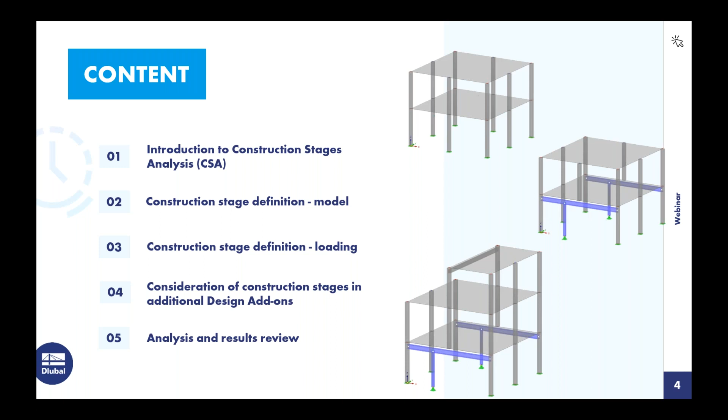So we might be wondering, why would we want to consider stage construction? Well, we know during the construction process that the structure may actually pass through several loading conditions that vary from the completed structure. For example, when we're talking about multi-level story buildings and adding each additional level on top of each other, the previous level is already undergoing deflections and stresses. So if we look at the building on the right-hand side, we set up our formwork for the first level, we let the concrete cure, we remove the formwork and we move on to the second level. That first level is already undergoing some of these deflection stresses from self-weight alone, or maybe some of those additional construction loads.

So we'd like to take those into account with stage construction. Now, regular simple structures may see very little difference when we compare the stage construction to simply applying the loads to the finished structure. However, when we're talking about multi-story buildings or structures with vertical irregularities, such as interrupted columns or walls, we might actually see a significant result difference between the finished structure versus taking into account each continuous stage. The construction stage analysis add-on within RFEM allows us to compare similar structures under different modeling or loading scenarios in a single file, and we also can include nonlinearities with these comparisons. Rather than creating multiple files with the first level completed, then the first level and second level completed, we can consider all of that in a single model.

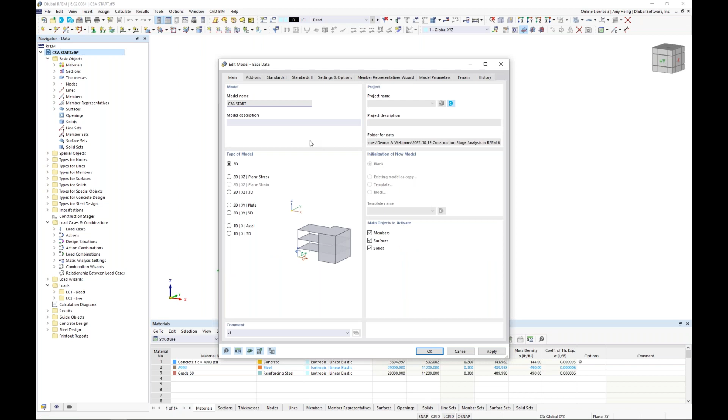Within the navigator to access the base data. Now, this is the same dialog box that would initially pop up when you create a new model as well. So under this second tab, this is where we have all of these optional add-ons. And this would allow you to essentially purchase these add-ons specific to your materials and your design that you're doing for your particular projects. For today, we're going to be working with the construction stages analysis add-on. You can see that's turned on here, as well as the concrete and steel design add-ons located over here on the right.

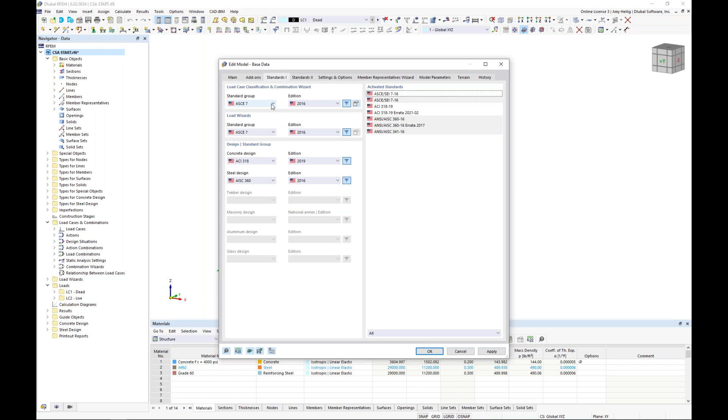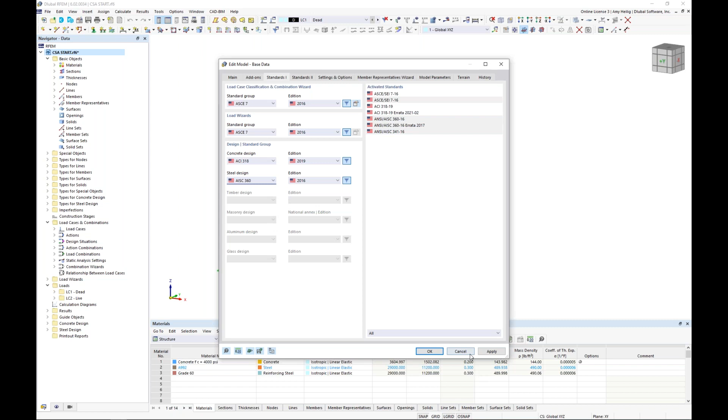So now under the third tab, this is where we set our standards. So we want to generate the load combinations according to the ASCE 7, which is available within this dropdown. We'll see here the NBC standard, as well as Eurocode and many other international standards. As far as the concrete design, we will be using the ACI 318, and steel design will be the AISC 360. Now, of course, again, using this dropdown, we can see the CSA standards available to us, as well as the other international standards. So once we have verified this information under the base data, we'll go back here to review some of the elements that have already been modeled.

So if we take a look again at the navigator, we'll see that all of our elements were utilizing 4,000 PSI concrete. Looking at our cross section, all of my columns here, if I double click on one of them, are going to be utilizing this 11-inch by 11-inch square section. Under the second tab, we can see that the concrete material here is set to 4,000 PSI.

Now, back under the main tab, notice that the design properties is checked on here. And this just simply means that we not only want to use this member for the analysis within the main program RFEM, but we're also going to do the design utilizing that concrete design add-on that we had turned on within our base data. So this just gives us all of the available tabs up here to define our reinforcement that will, of course, be used later on within the strength and serviceability design.

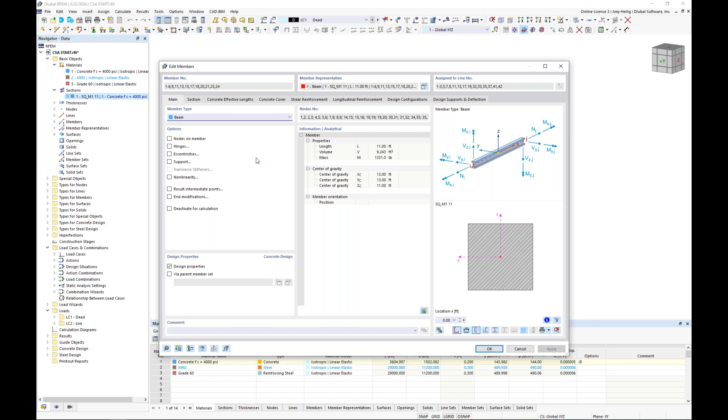Now, I'm not going to go into too much detail today. There is an additional webinar that's devoted entirely to concrete design according to the ACI that's available on our website and YouTube channel. So just to quickly cover this, we'll see here that we can specify the concrete cover. For the shear reinforcement, I have defined number 3s here at 12 inches on center. And then I also have my longitudinal reinforcement, which is going to be 12 number 6s spaced evenly around our cross section.

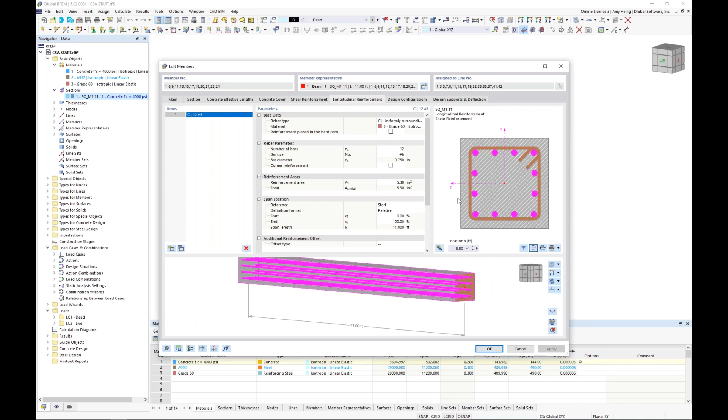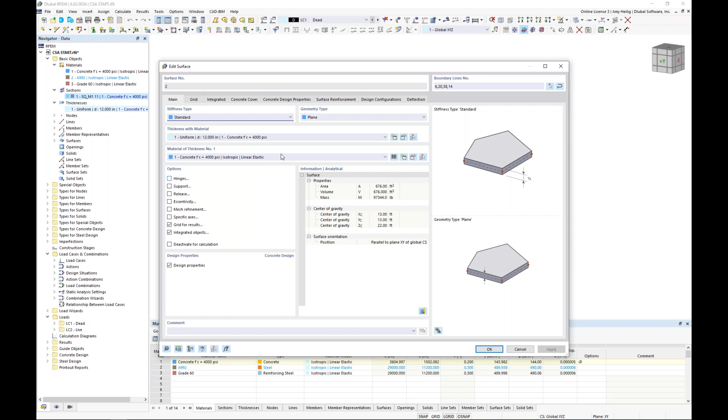So this is a very similar workflow here for my surfaces as well. Each of these surfaces was defined here with a thickness of 12 inches. So if I double click on one of these surfaces, again, we can see that thickness defined here, 12 inches with the 4,000 PSI concrete. Again, I've activated this design property, so we're not only using it for the analysis, but we also want to define our reinforcement for this slab to do the design later on within the concrete design add-on. We see here the concrete cover is defined, as well as the surface reinforcement.

So looking at this surface reinforcement, we can go into the details here. I have specified just simply number 6s at 6 inches on center in both directions for both the top and the bottom. So very simple application for this concrete slab. But I also have all of these additional free rectangular reinforcements defined. This just allows me to place some additional reinforcement. You can see number 6s again at 6 inches, where these concrete columns are framing into this slab. So rather than applying to the entire surface, we apply to what we call this free rectangular location.

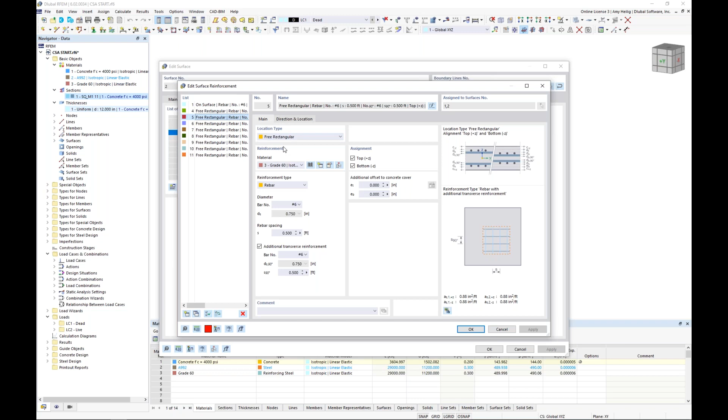So once we have defined all of our reinforcement here, what is actually turned on by default, if we go to our Display tab within our navigator, up here under the Types for Concrete Design, and maybe I turn this into wireframe view, we can actually see the reinforcement here displayed graphically. So we see our shear and longitudinal reinforcement for our concrete columns. And then, as I mentioned, those slab elements, we have our number 6s at 6 inches on center, but we also have some additional reinforcement here where those columns are framing into the slab. So we can always turn off this display just to get a little bit of a cleaner look here.

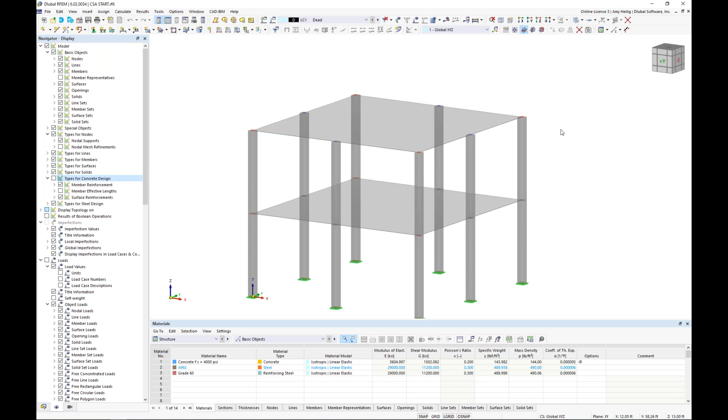Now, additionally, what else I have hidden, which I will turn on now, is the mesh refinements. So I've added these FE mesh refinements, you can see by these symbols here at the tops of each of the columns. So we know that within the program, we're likely going to get what we call singularities, where these single line elements, which are essentially our members here, frame into these slab elements at the single FE mesh point. So I'd like to refine the FE mesh here, which you can see I have gone ahead and done with a nodal mesh refinement.

Additionally, what I have defined, which we'll find here under the result objects, is what we call surface result adjustments. So now we can see all of those displayed here at the tops of our columns. And if I double click on one of these, we can see we have the ability to actually average out the internal forces over a set area. Again, this just helps smooth out those singularity areas.

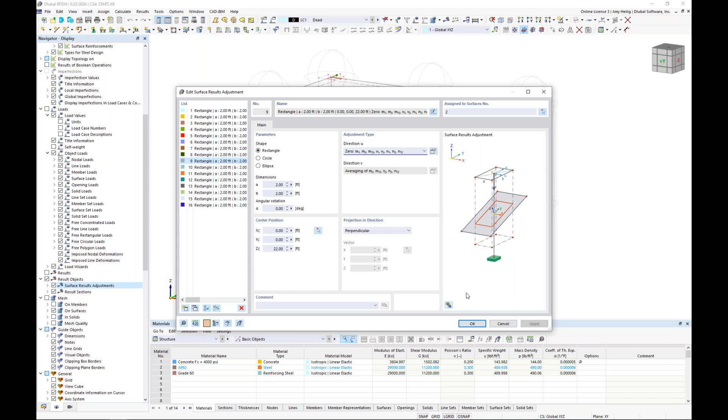For my simple example today, I actually just zeroed out those internal forces at those locations. They're not really a concern for our simple example today, so I went ahead and set that as the definition type here for these surface result adjustments. Again, all of this is just to help with those singularity issues. So we'll go ahead and turn those off. These will come into play a little bit later on.

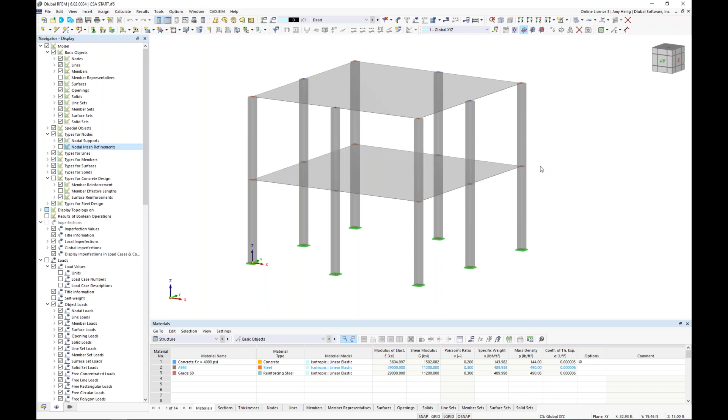But for now, we will turn this back into the rendered view. So this is my starting structure, just simple two-level concrete elements. And ultimately what I'd like to do is to remove these center two columns here on the first floor. Instead of these center two columns of this existing structure, I'm going to add in some steel beams that span between these exterior columns underneath the slab, as well as a couple of steel columns slightly offset from the center of the structure.

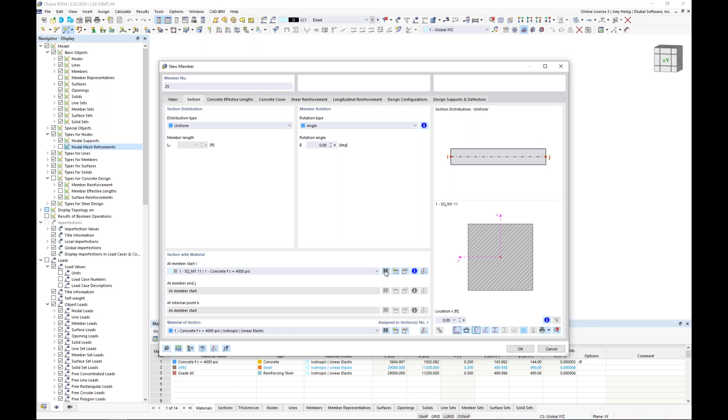So we're going to deactivate these columns and instead add in some steel members, which will describe the workflow of our staged analysis. Before we define any of these construction stages, we need to ensure that we have everything completely modeled in RFEM. So we will begin by drawing a new member, and up in my quick toolbar, I can draw a new single member.

Now, under the section tab, I want to define a new cross-section by visiting my cross-section library, and we can see all of the various sections available, including the parametric sections, where we simply input the dimensions and the cross-section properties are calculated automatically. Alternatively, we can view these standardized sections. For example, we can activate our I-beams, use our filters on the left to filter to the United States and to the AISC 15, and I want my beam section to be a W14x82. So I scroll down my list and select the 14x82.

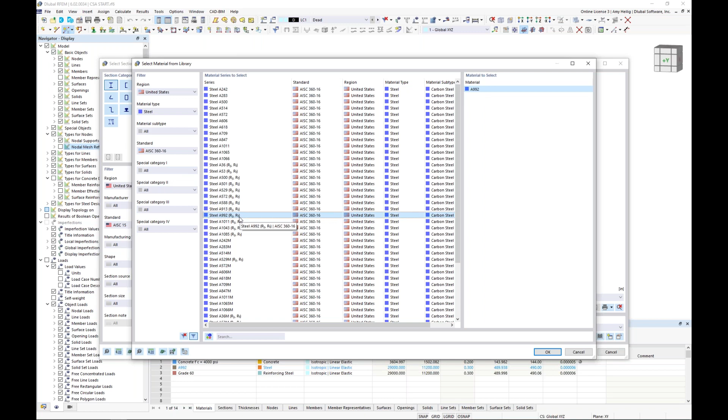Of course, we don't want this to be a concrete material, so we activate our material library for this particular section. Once we launch our material library, we can use our filters on the left to filter to the material type steel, set the standard to the AISC 360, and we'll see steel A992. I already have this steel material defined within this model, so rather than redefining a new material every time, I can just select it within my dropdown. So I select material number 2, A992, and our beam has now been defined with the correct cross-section as well as the material properties.

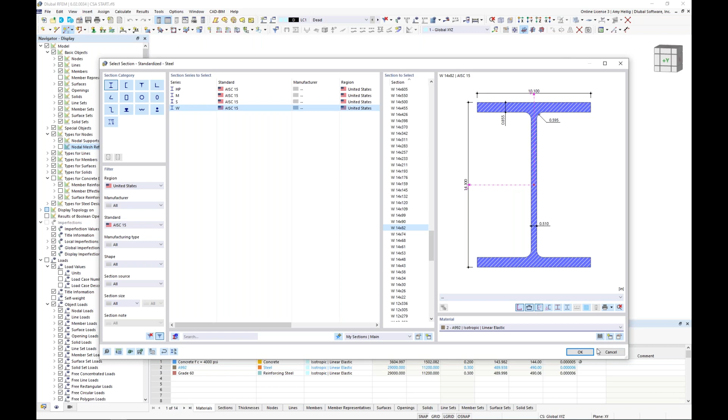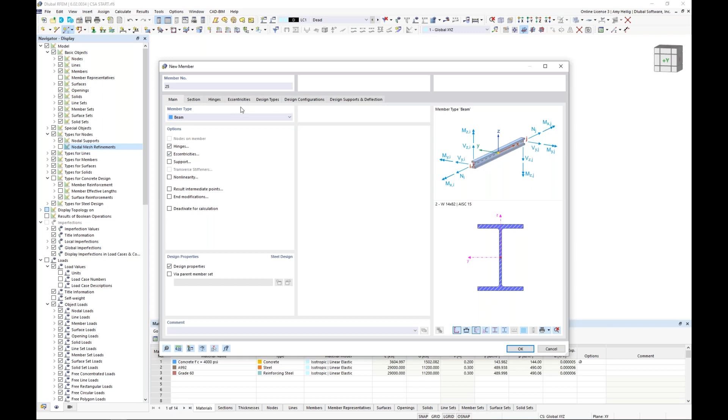In addition to defining the cross-section and material, notice that the design properties is turned on as well, but we're no longer referencing the concrete design add-on that we activated under the base data; we're now referencing the steel design add-on. Before I draw these members, I also want to activate a couple other options, including hinges and eccentricities. Notice we have two additional tabs up at the top. Remember that everything within RFEM is considered fully fixed. So if we want to release a moment, for example, at the ends of the member, we need to define a new member hinge.

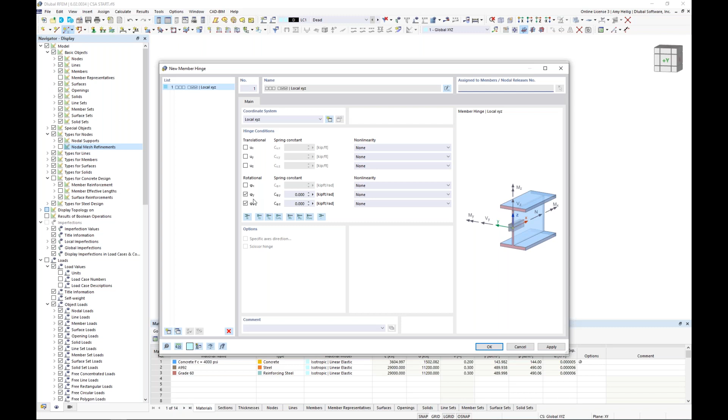We do so by activating the hinges and creating a new definition type, and the program automatically assumes that I'd like to release the moments about the local Y and local Z axes of the member. So this is a member end moment release. I click OK, and now I've applied that to the member start. Rather than redefining for the member end, I can simply select it from my dropdown. So we release the moment at either end of this section. The eccentricities is a very similar workflow. We define a new member eccentricity, and I'm going to use the option within my dropdown relative to section.

And I will tell the program to take the topmost point of my cross section, and I actually want to offset it from an additional object that already exists within my model. And I'm going to select here the option surface, and then I can graphically select surface number 1. And I want to drop this beam member down below the bottommost point here of this surface.

So the whole advantage here of using this option relative to section is that if I make any changes to my cross-section size, or I make any changes to the thickness of my surface, well, this eccentricity will automatically update. I don't have to come back in here and adjust it manually. So we apply that eccentricity definition to the member start. We also want to apply it to the member end.

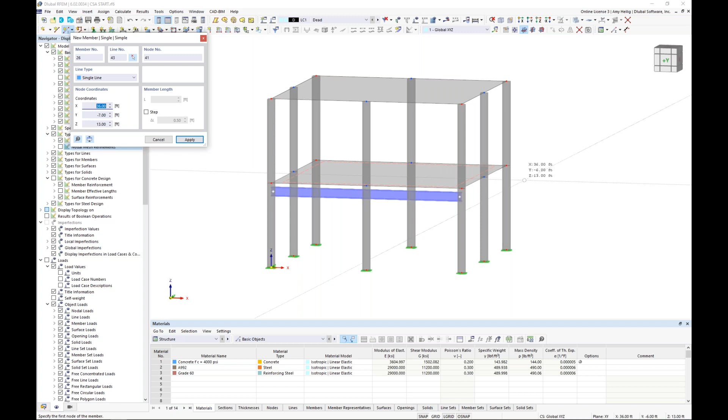So now that we have defined the hinges and eccentricities, I click OK, and then I will snap from the right-hand column to the left-hand column at the front of the structure, and also do the same at the back of the structure. So now we can see this steel beam drop down below the surface. Obviously, it's intersecting these concrete columns, but that's completely fine. We'll make these changes later on with the construction stages so that both of these do not exist together.

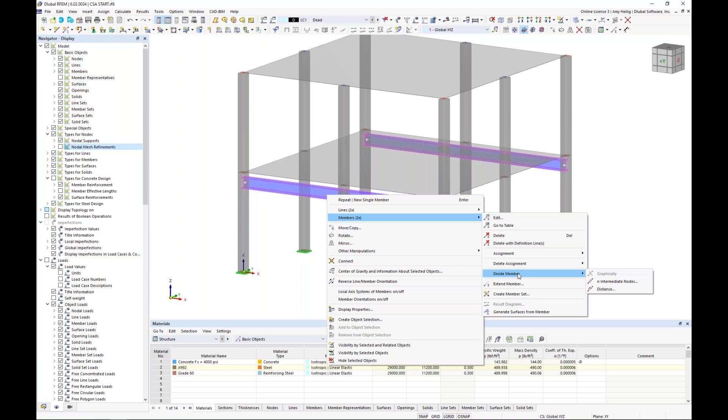I'm going to hold down my control key and select both of these members. And I want to right click here, and under the member option, I'm going to divide the member by a set distance. So here is where I want to add a node along the member 8 feet from the member end. But instead of actually dividing the member, I'm going to turn on this checkbox here to create the node along the length of the member without dividing it.

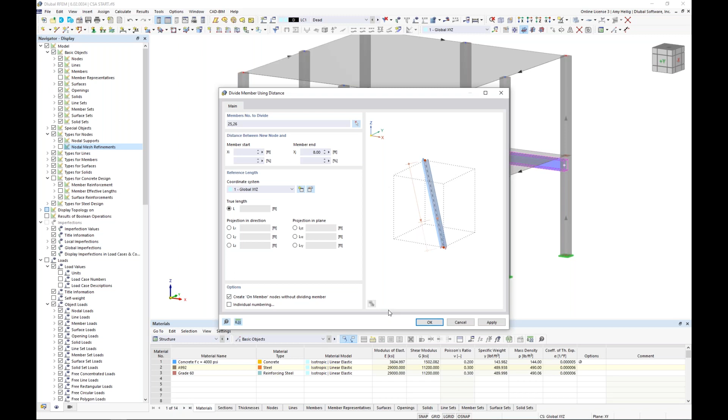So when I click OK and we turn this into wireframe view, you'll see that this is still one continuous member, but we now have a couple of nodes here defined along the member length. And these nodes are special in the sense that they're of the type on member, and the program automatically detects which member it should be integrated with.

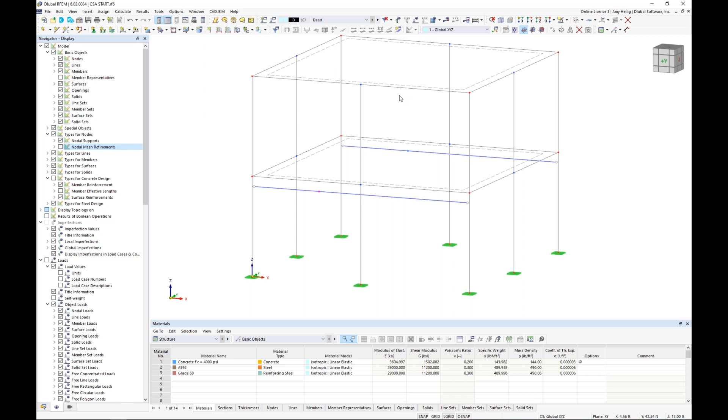So what this allows me to do now is to draw in my steel columns that will frame into these steel beams. So I'll begin here by just adjusting my drawing work grid, and we can turn this on at the bottom of the page here, and we will also adjust the plane. And I will create a new cross section yet again. So the member type is set to beam. The section here will be defined once again from my section library. In these standardized sections, I want to select here a W8x35. Remember, I already have my A992 material defined within the model, so I can select that here.

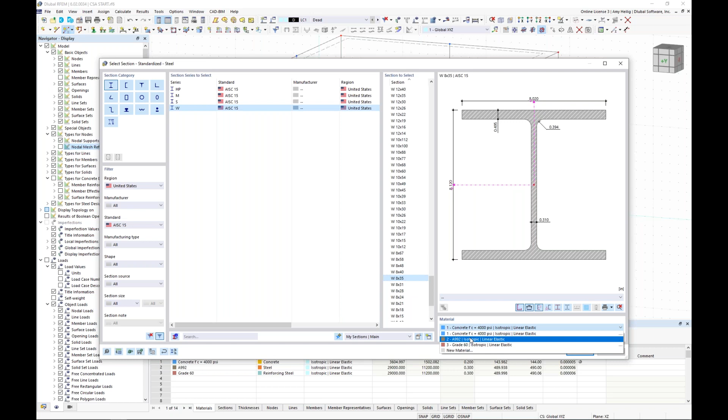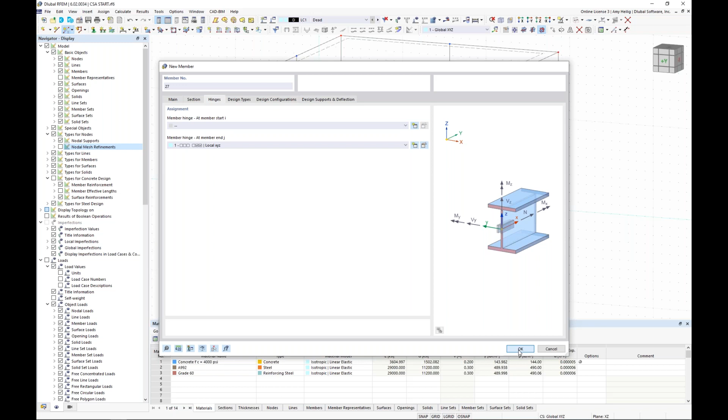I click OK. And the one thing that we'd like to add here is also a hinge definition. So under my hinge tabs, remember I have already defined that moment release, so I can select it here from my drop down as well, where I can release the moment at the member end. I click OK, and then I'm going to snap from the bottom of the structure up to that node that was created. I can right click to exit this dialog box. If we take this element, we can highlight it, hold down our control key, and we can drag and drop to the rear of the structure to create that additional column.

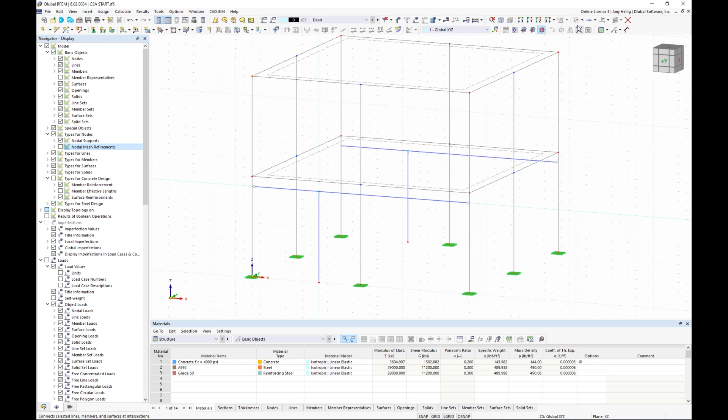So now that these two columns have been generated, there's a few additional things that we want to take into consideration. Number one is we obviously need to add some supports to the bottom here. So we'll go ahead and add in a new nodal support. We're just going to use one of the default definition types here, hinged. I can click at the bottom of these steel columns to add in that nodal support.

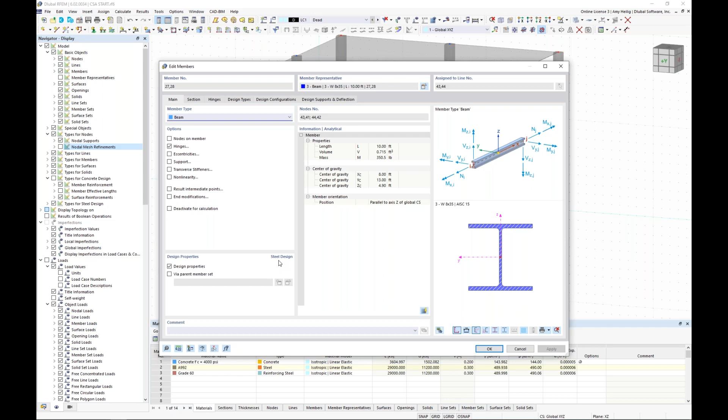The second topic is holding down my control key to select both of these columns. So remember, we are going to design these members utilizing the Steel Design add-on at the end of this example. But one thing that is required if we want to do so is we do need to define information like the unbraced lengths. And we do so here under the design types effective lengths. Now, again, I have an additional webinar devoted entirely to steel design according to the AISC that goes into much more detail to talk about the unbraced lengths or effective lengths definition type here.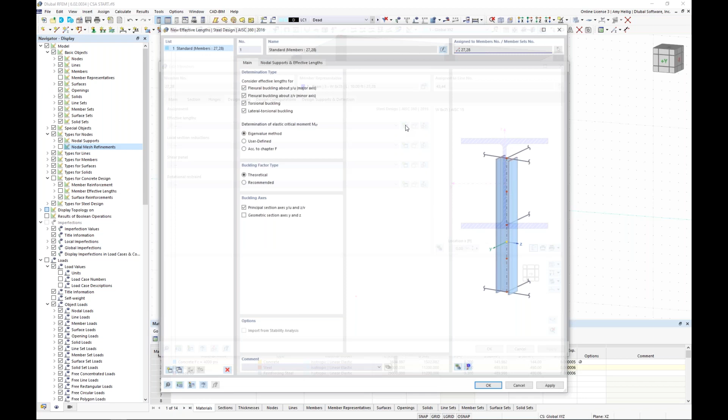So we'll just quickly add in these intermediate supports that are going to be applied here for flexural buckling, torsional buckling, and lateral torsional buckling. And under this second tab, the default options is to add in this intermediate support at the member start and member end.

And now my unbraced lengths for my stability design will default to the full member length. So when I click OK, you can now see that we go back into the model and the unbraced lengths have now been defined here for these particular elements.

Now we need to do the exact same thing here for our beam elements. So we'll go ahead and select both of these elements, and under the design types here, we define a new effective length. But this time, the slight difference is I want the program to go ahead and detect these intermediate nodes, and in particular where this steel column frames up into this steel beam, where I can add an intermediate support in the vertical direction here. So now the program will consider this with the effective lengths or the unbraced lengths for our stability design.

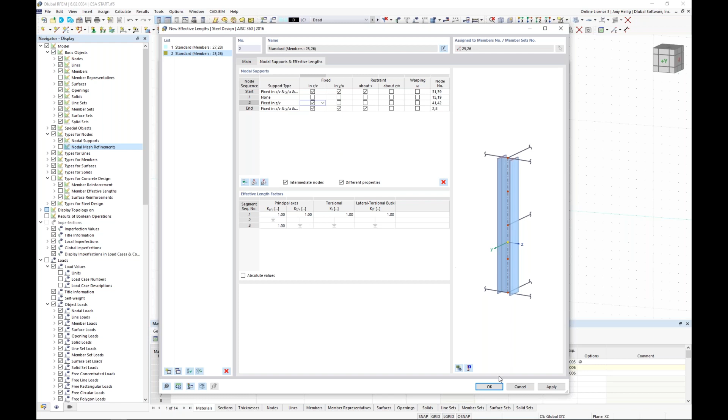Okay, so that takes care of the unbraced lengths, which will again come into play a little bit later on for our actual steel design according to the AISC. The final topic here related to this first story is currently this slab element is entirely connected to this steel beam. So full force transmission, full moment transmission between these two elements. Now, if we would like to release some of those degrees of freedom, what we can do is to consider what we call a new line hinge.

So under the option here, types for lines, we expand this folder and we see here a line hinge where we can right click to create a new definition type. So with this line hinge, I'm actually going to release all degrees of freedom. So we have 3 in translation based on the local X, Y, and Z axes, and 1 in rotation. Now keep in mind that these are based on the local axes of the line element itself. So not the local axes of the surface or of the member, but of the actual line. Each line has its own X, Y, and Z axes.

But rather than obviously keeping these as fully released, we do want to add in here a nonlinearity. And this nonlinearity will allow the slab to bear down on the beam when we have this downward deflection. So if we have a negative shear value in the local Z direction, then we should see full fixity. But if we have uplift, then that relationship between the slab and the beam will be released. So again, applying this nonlinear behavior here to this line hinge.

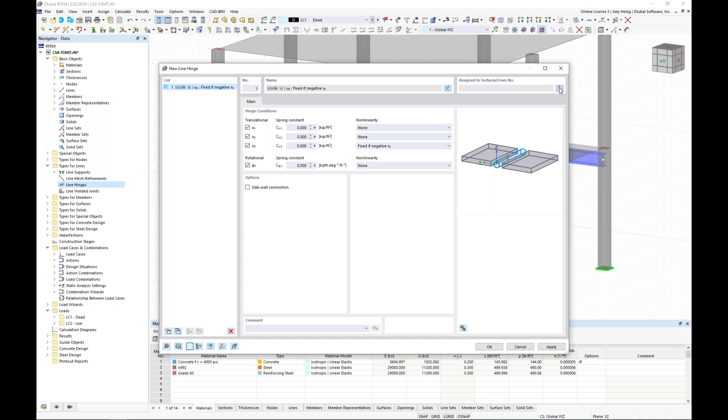So once we have the definition type presented here, we want to actually apply it to the model. And we do so by first selecting the surface that we want to apply the line hinge to. Then we will select the lines where we can select the front line number 12 concurrently with the back line here, number 18. And we click OK, we click OK. We can zoom in here, and what we will see is a very small symbol for that line hinge definition. Again, this will also come into play with our construction stages. So we're now complete with this first story.

The final thing that I want to do with this model is to actually add in a third story, a partial third story. So we want to do that, but before we do, if you remember, I'm going to go back to the nodal mesh refinements. I'm going to turn back on my concrete reinforcement and also those surface result adjustments. And I'm doing so because when they're graphically displayed here, this will ensure that when I copy all of these elements to the third story, all of these details are also copied. So we can go ahead and highlight this top story here, including the reinforcements, mesh refinements, and so on.

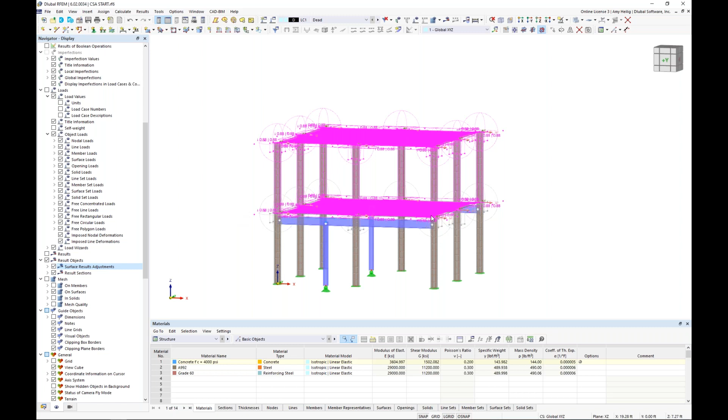Now, normally we could use this simple drag and drop copy that I showed you with my steel columns, but I want to take advantage here of the Move Copy tool for a specific reason. So we're going to create a copy here of that second story, and I can either type in my displacement vector or we can use this measurement tool. So I can kind of snap here to the bottom of that second story to the top, and we see the program automatically detects this is 11 feet in the Z direction.

But under the numbering and options, I have the ability here to not only copy all of the elements, but also the loading. So I have some existing loading on the structure for dead load and live load, which we'll visit in just a few minutes. But by activating here this checkbox, all of those loads will also be copied.

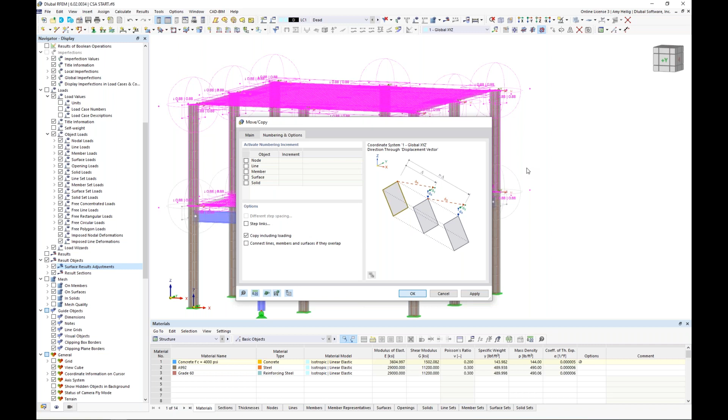So I click OK. And what we should see here then is the addition of this third story. Now for this third story, I actually want it to only be a partial third story. So we'll need to clean this up just slightly, and I can do so by holding down my control key to select the top of these nodes of these columns. I hit delete on my keyboard, and now all of those columns are gone.

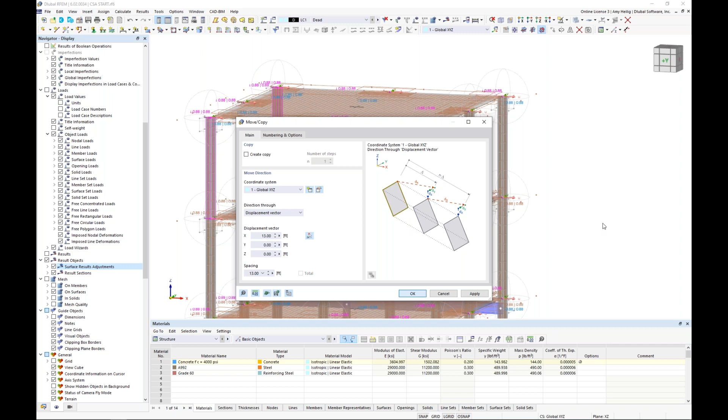I'm also going to hold down my control key to select my columns as well as the nodal point here at the tops of the columns. And I'm going to use my Move Copy tool once again, but instead of creating a copy here, we'll go ahead and uncheck this. I want to use my displacement vector. I will select from the left-hand side of the structure because I want to move those columns right here to the center of the structure. So displacement vector of 13 feet. So now when I click OK, what we should see here is that partial third story.

Now, notice that all of my reinforcement was copied as well, and it's somewhat adjusted here as I essentially shrunk down this third story to a partial third story rather than the entire area here. So back under my navigator, we can see here the types for concrete design and all of my surface reinforcement listed. So the program was intelligent enough here to go ahead and apply the same reinforcement to that third story. And we see our number 6 is at 6 inches on center. We also see our free rectangular reinforcement that was defined for that third story.

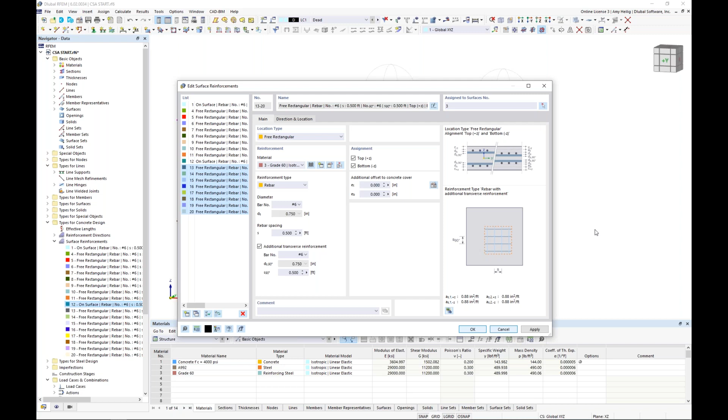So we can make modifications here if maybe we're not needing such close spacing, or we want to make modifications to our bar diameter, we can do so. But for this example, I'll leave everything as we see here. So all of this information over here that exists, we can simply highlight it and hit delete on our keyboard. So essentially the modeling is now complete for this structure. Again, before we define those construction stages, we need to ensure that everything is fully modeled within RFEM itself.

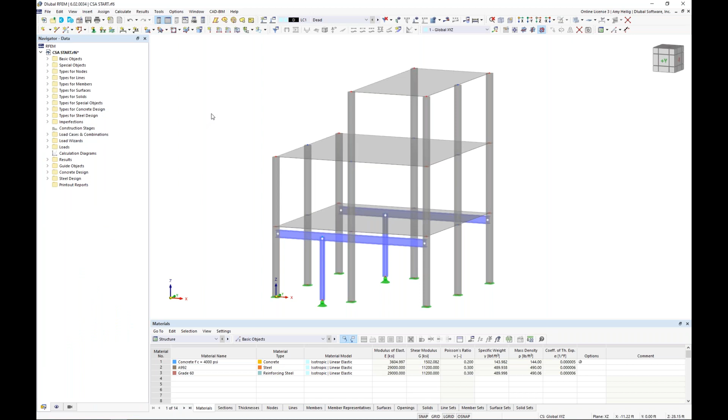So I want to go ahead here and turn off the nodal mesh refinements. I'll turn off my reinforcement and those surface result adjustments just for a cleaner look. So now we're finally ready to begin with our construction stage definition. So back in my navigator, we have a nice feature here. If I right click, I can actually collapse all of these folders. And actually there's one more thing that I had forgot before we define our construction stages: maybe we wanted to apply a quick rib element here that spans between these columns.

Just to introduce you to this rib type, we can draw in a new single member. And we can see here the member type would actually be set to rib. Now, what's special about a rib is we can integrate it with the slab. So those internal forces will now include the internal forces from the slab for some effective width that we define. We also can turn on the design properties to design this as a T-beam, including the reinforcement in the concrete design add-on. For today, I'm not so interested in designing it. So what I can do is just simply turn this off. I only want to consider it for the analysis. Notice all my tabs here to define my reinforcement are now gone.

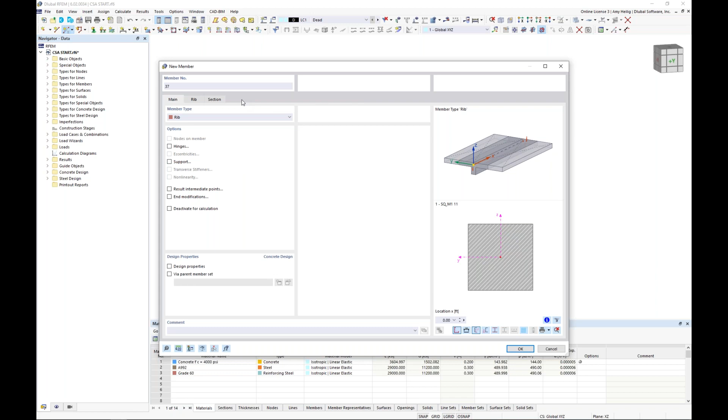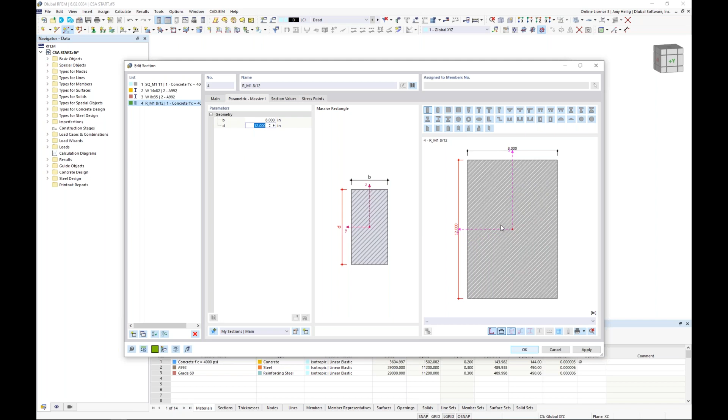So under the section, we will create a new cross-section type for the last time, and we'll choose this massive rectangular section, where I can quickly choose under the second tab my dimensions, and I will type in directly 8 by 12 inches for this rib element. 4,000 PSI concrete is already defined, and under this second tab, we want to drop this down below in the negative Z direction of the surface element itself. So when we click OK, we can actually draw in this rib element from right to left. So again, internally, we are including the effective width of this element. If we revisit the rib section, we can actually see that drawn here graphically.

Okay, so now we are done with all of the modeling within the RFEM program here. So we can move on to the construction stages. So we've collapsed all of these folders here. I just wanted to make this a little bit more visible. You'll see here the construction stages option. Now this is only available because, again, we activated that construction stages analysis add-on under our base data.

So we will start here by right-clicking to create a new construction stage. You can see the program defaults construction stage number 1, and it gives it the name of Start.

We can override that name if we'd like, but we need to tell the program which elements are active for this first stage. We'll begin with our members, our surfaces, as well as our nodal supports, and we get additional tabs up here. You'll notice this option for time-dependent analysis is grayed out. This is still in development. Eventually we will link the construction stages analysis to our add-on for time-dependent analysis to take into consideration topics like creep and shrinkage, but for now this is still in development.

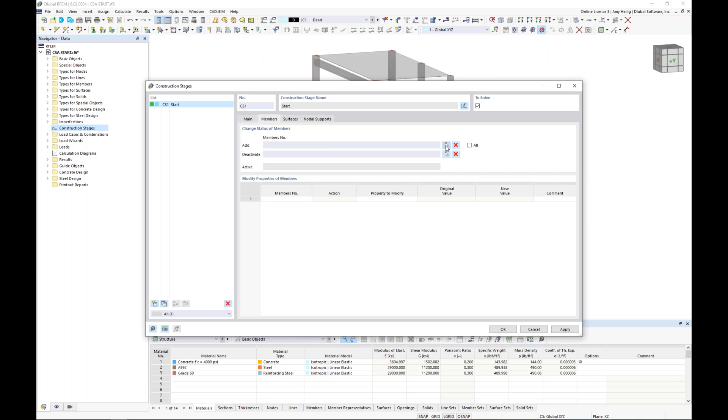Under these additional tabs, what we'd like to do is add in the initial elements for that first stage, beginning with our concrete columns. At this first level, I'm going to select all of my concrete columns, making sure I'm not selecting any of these steel elements yet. For my second floor, I select all of my concrete columns here as well.

I click OK. For my surfaces, I want to activate surface number 1 and surface number 2, and I click OK. Finally, for my nodal supports, I want to activate the nodal supports at the base of these concrete columns. Again, I am not selecting the nodal supports of my steel elements, and I click OK. So my first stage definition is complete.

I'd like to create my second stage definition here, which I can do in the lower left corner, number 2. You can see I again have the ability to override the name, so if I'd like to rename this one, we can call it Add Steel Members.

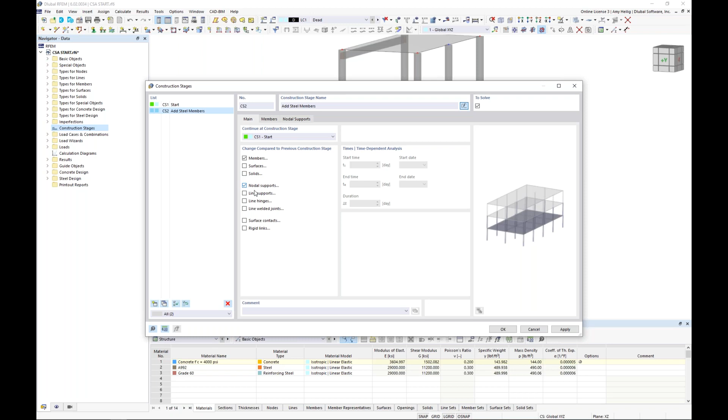I want to activate here my members. I'm not actually making any changes to my surfaces, so we can leave this active, but for simplicity we can also turn it off since we're making no changes. We can go ahead and select the nodal supports, and remember we also added in those nonlinear line hinges, so we want to activate this here as well.

Now under the members, this is where we want to deactivate those center concrete columns. So I select here graphically members number 9 and 13. At the same time, I'm going to activate all of my steel members, so I can graphically select all 4 of these steel members. This entire process is going to be completed within this second construction stage.

By all means, we could have separated these options into two stages. Perhaps we'd like to deactivate our concrete columns first in one stage, then add in the steel beams in an additional stage. It all just depends on how your construction stage workflow is for your particular project. But for me, I just define these all in one stage, so that will happen simultaneously.

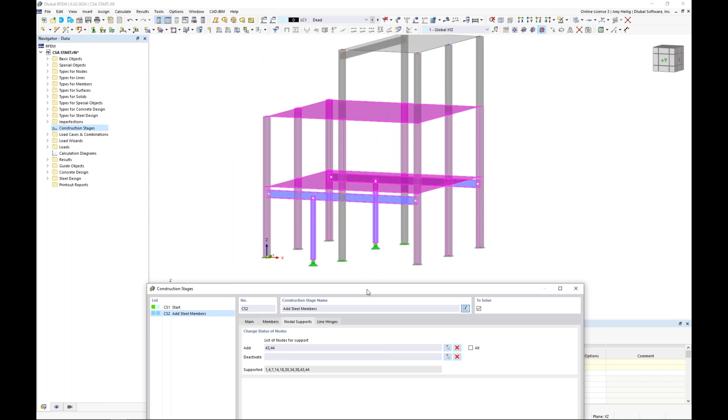Now the nodal supports - we do need to add in the pin nodal supports at the base of the steel columns, so we go ahead and select those. I don't need to worry about deactivating the supports at the bottom of the concrete columns, and in fact the program won't even let me because it says these members no longer exist. So those supports are no longer active either.

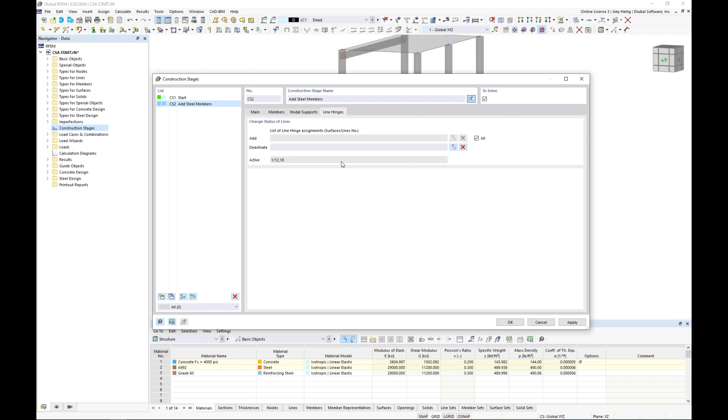Now finally we also have the line hinges, so I can graphically select the line hinges, or alternatively I can just simply hit this All checkbox. We only have one line hinge definition in the entire model, so this option will go ahead and activate all line hinges here. This will complete our second construction stage.

Now the final stage, which we again define down here in the lower left corner, we want to rename this one to Add Third Story. The options here to activate - we want to leave on the members, we also want to activate the surfaces, but everything else can be unchecked.

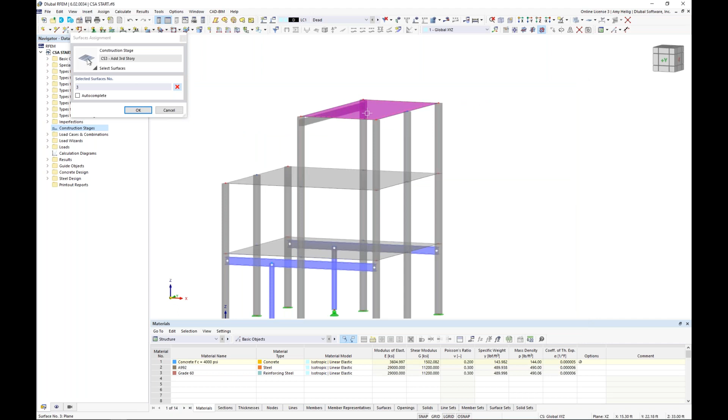For our members, we want to of course add in all of our concrete columns and even that rib element at that third story. I click OK, and then for my surfaces, I could either type in directly surface number 3, or I can graphically select it here. This will sum up my construction stage definitions.

So once I am done defining all 3 of these stages, I can click OK. And what you'll actually see here at our dropdown is each of these construction stages presented to us where we can graphically see what's going on.

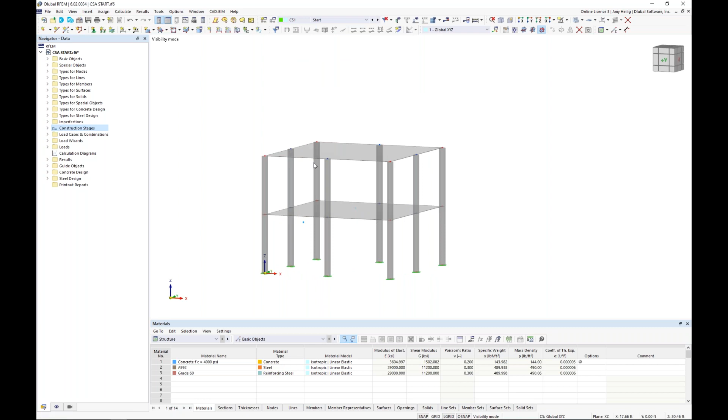So here's stage number 1. Here is stage number 2 - notice those two concrete columns are gone, and we've added in our steel elements. And finally, we have the addition of the third story. This sums up the construction stage definition from the modeling point of view.

But now we need to move on to the loading. How can we integrate the load cases as well as combinations to these various construction stages?

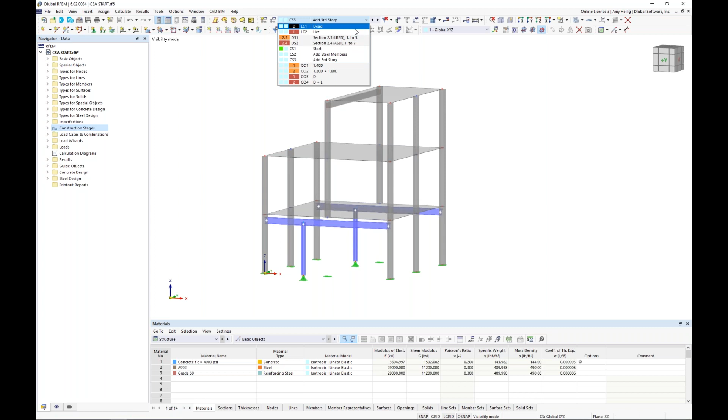I want to point out first that I have already applied two very simple load cases to our model. If I activate my dead load and turn on the display of these loads, just simple surface loads applied to all three levels. Remember, when we copied this third level, the loads were also copied.

Just a simple 35 pounds per square foot for our dead load. Same concept for our live load, slightly different magnitude here of 40 pounds per square foot applied at each level. Now, for a project in real life, we'd probably want to add in wind loads, snow loads, whatever else it may be, but for this simple example, we only have these dead and live loads.

So I'm going to access my load cases and combinations dialog box, and we see these two load cases listed. Dead load, where self-weight is automatically turned on with the action category set to dead load directly from the ASCE 7. The second load case is live load, again with the action category set to live.

If we back this up a step, remember under the base data, which we modified at the beginning of this example, I told the program I want to generate my load combinations automatically according to the ASCE 7. Of course, we can make changes here if we wanted to switch to the NBC or any other standard. But when this option is turned on to generate the load combinations automatically using this combination wizard, the program will reference the selected standard to automatically create those load combinations.

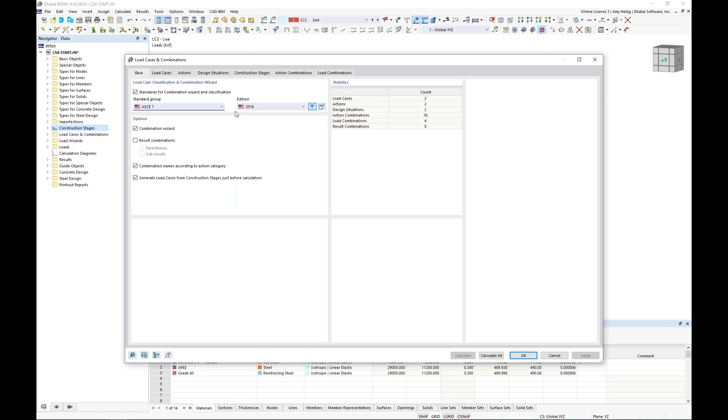So let us take a look at the design situations. These are absolutely needed when we want to do design in the various add-ons. We have activated the concrete design add-on and the steel design add-on, and we'll see a little bit later on why we need these design situations.

The design situations essentially encompass all of our load combinations. We have two of them here: our LRFD design situation from the ASCE 7, which is all of our factored load combinations directly from the standard, and a second design situation for ASD, which is our unfactored load combinations. We can reference here to see exactly what they look like according to the standard.

Now if we take a look at the load combinations tab, here are my individual load combinations strictly for those dead and live loads, since I don't have any additional load cases defined. I have two factored load combinations that belong to that LRFD design situation, shown here in orange, and two unfactored load combinations that belong to my ASD design situation.

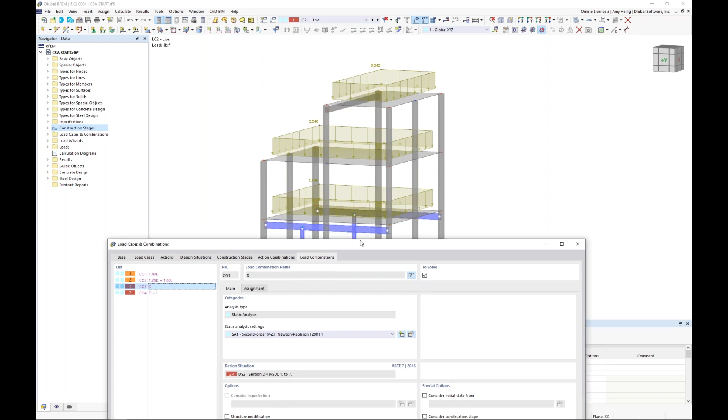Now, if I was applying the conventional method of applying all of these dead loads and live loads to my structure - on the finished structure with the third story and the steel members - then we would just go ahead and move on with the calculation utilizing these load combinations. But currently, they are not referencing those various construction stages.

So what we want to do here is go to the construction stages tab. Here we see our three stages that we have already defined, which are automatically brought into this dialog box. Notice that each one of these stages will go ahead and reference the previous stage - it says continue at construction stage number 1 for number 2, and then our third stage is referencing number 2.

A couple other options to point out here: the construction stage analysis is done according to the load combinations. This option is grayed out because it's also in development - in the future we plan to add the option for load cases and a result combination using linear superposition. This would be for linear structures where we don't necessarily have to incorporate the construction stages into each load combination, but rather we superimpose the results on the finished structure using a result combination instead.

This could be a really powerful increase in performance for multi-level story structures, especially when we have hundreds of load combinations, making things very efficient. But for now, it's still in development, so that option is grayed out.

Now the static analysis setting is really important. You can see my construction stages right now are set to second order. If I go into the detail settings here, we could change this to first order, second order, or third order.

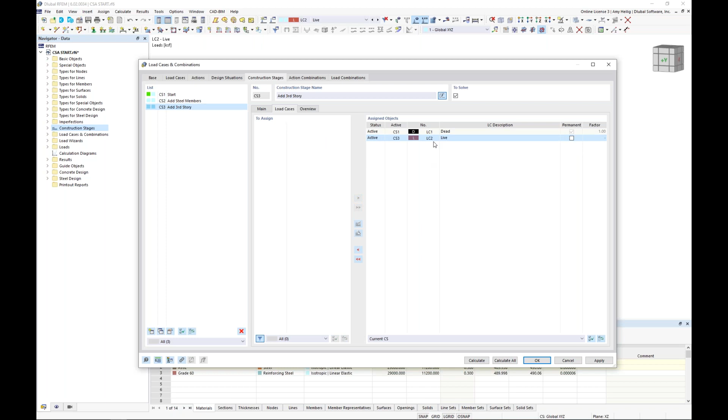Finally, we have our third construction stage where we've added in that third story, and dead load is already automatically included—it has to be because of that permanent checkbox—but I'm going to factor back in my live load here. So now we've allocated each one of these load cases to the construction stage.

The final thing to do is tell the program to create the combinations utilizing the construction stages as well as the combination wizard. So I turn on this checkbox and go into the detail settings, telling the program not to consider the normal load combinations we previously saw, but rather just consider the construction stages only. I'm not concerned with the final structure and applying those loads with the conventional method.

I click OK, and then we can simply turn on this checkbox for the rest of these stages. This checkbox is already turned on if we go into the detail settings, because it's part of this combination wizard definition type number 1.

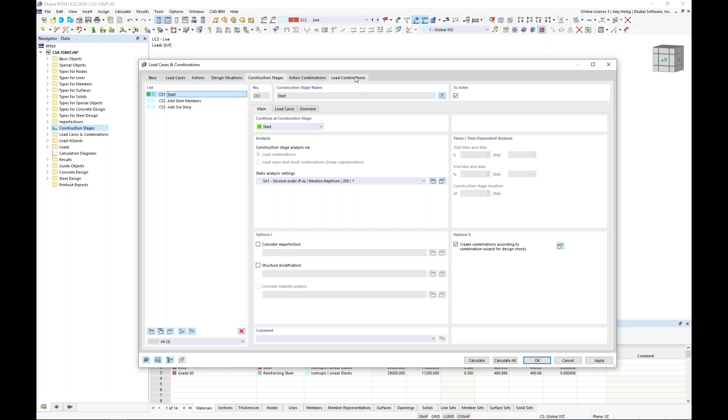Now that we've selected this checkbox, we should see slightly different load combinations shown under this last tab, and sure enough we do. We have our factored load combinations, part of that first design situation, but they now consider the construction stages. For stage number 1, we have 1.4 dead load. For combination number 2, still construction stage 1, we're now also considering the live load, so dead load plus live load. For construction stage number 2, I'm only considering the dead load, so 1.4 dead—remember, live load was not incorporated into this particular stage.

But notice that over here on the right-hand side, the program says, okay, well, for the initial state, I'm going to consider the previous construction stage. You can see our load combination number 1. So it will take into consideration those strains, those stresses that the structure is already undergoing from construction stage number 1, and apply this to construction stage number 2 for this particular load combination.

Same exact concept here for construction stage number 3. We can see the initial state is set here, but we're also factoring back in our live load. So we see 2 additional load combinations here. Same exact concept for my unfactored load combinations that are a part of this second design situation here, my ASD design situation.

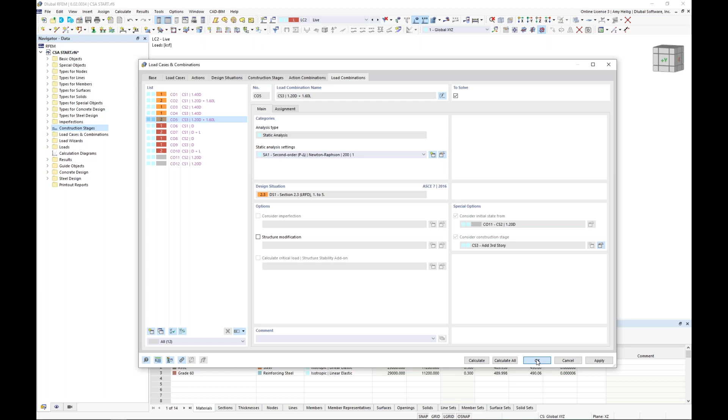Okay, now that we are done defining the load combinations, again, considering the construction stages, we're finally ready to run an analysis. So before we run the analysis, what also is nice is that in my dropdown, I see all of those load combinations listed here, and I can actually cycle through them. So here's load combination number 1 with my dead load. Here's dead plus live. Here's my second construction stage, again, only with the dead load. And then I move on to the addition of that third story with the dead load consideration and then dead plus live. So again, the program's automatically combining all of these together.

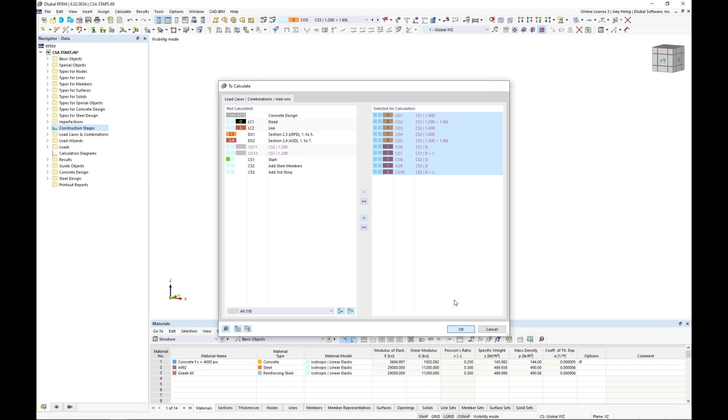So under calculate, we go to the option to calculate, and I am going to select here only my valid load combinations to move over to the right-hand side. And when I click OK, the program is going to generate the FE mesh, and then new within RFEM 6 is this multi-core processor where we can solve load combinations simultaneously for a little bit quicker analysis here.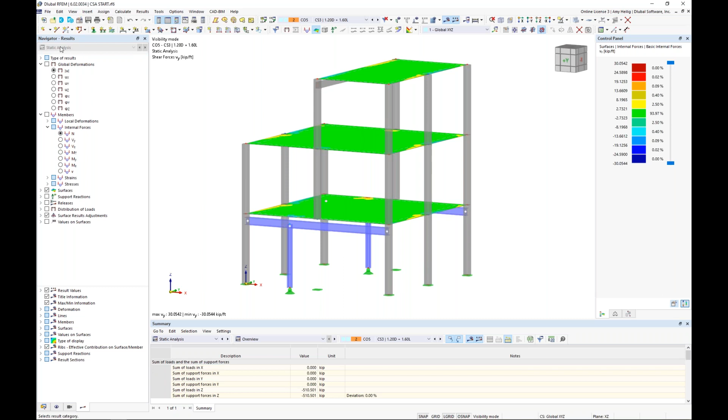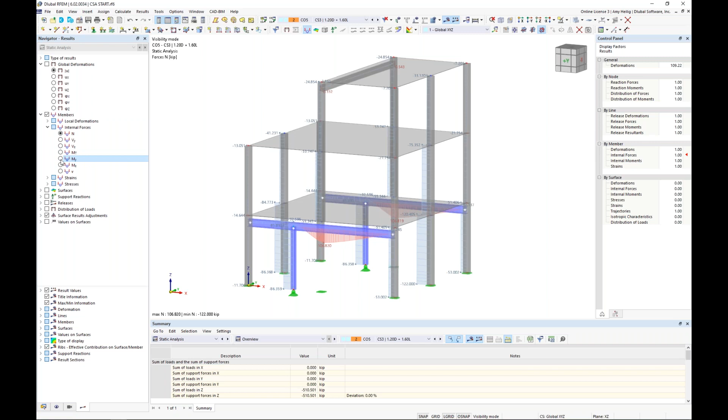So once the program is done solving for all of these load combinations, we're now presented with the static analysis results. So no design yet, just purely the analysis portion within RFEM itself. And we can see our results available to us in our navigator over here. For example, we're looking at load combination number 5, and we can view the global deformations of the structure. We also can take a look at the member internal forces, for example, the axial forces. Maybe we want to take a look at the bending moments here for our beam elements.

So all of this is visible based on the various load combinations, again, that have factored in these stages. And of course, we also have our surface results where we can view the bending moments, MX, MY. We can view shear forces. This is obviously for my initial structure, stage number 1.

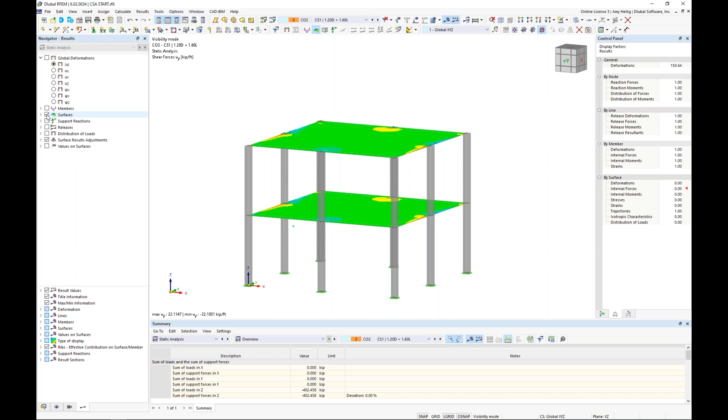So that is essentially the analysis with these construction stages, but I would like to show you how to incorporate also the design with these stages as well. So we can activate the design add-ons by selecting it within my drop-down box here down in the table. And we see here concrete design, and this is available because we activated the concrete design add-on within the base data at the beginning of the example.

And you remember I stressed how important those design situations are because they are absolutely needed here when we move on to the design portion of our model. So we have here our first LRFD design situation. We're going to select here from our drop-down to relate this to the strength design for the ACI standard. Then I have my unfactored load combinations where I'm going to relate this to the serviceability design.

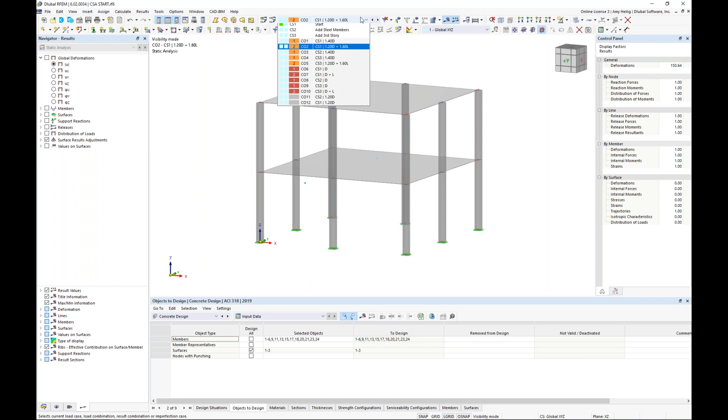Under my second tab, I would select all of the objects that I would like to design, and I can select all of my concrete members, except for, remember, I'm not going to design this rib element here, and maybe I want to design all 3 surfaces. So that's what's currently selected here. So I'm really ready to run my design as well, and I can choose this option here, show results.

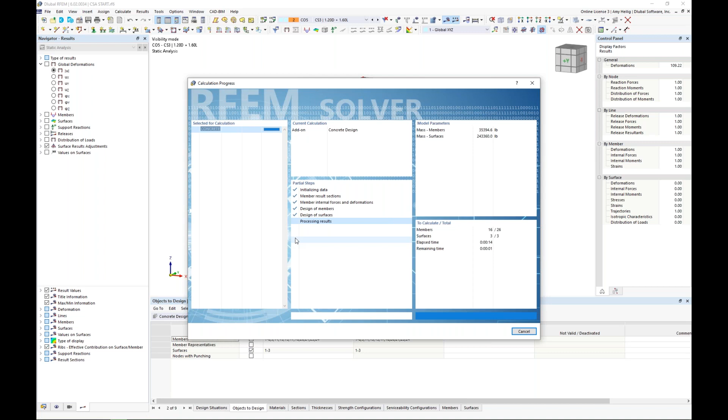Now, I already have my internal forces from all of the load combinations. They're just simply brought into this add-on, and the equations from the ACI are applied. We consider the reinforcement to ultimately get our design ratio and required reinforcement for each one of these surfaces as well as our members. So once we are done doing the calculation, we can view here the design ratios on the surface, for example, and we're currently in table format.

And notice at the bottom, we can view the design ratios by the construction stage. So here's construction stage number 1. Now we can view each one of these checks here for construction stage number 1. Notice we have a pretty high check here for our shear design. So we probably would want to address the shear design for this particular slab right around where this column element is framing in, but everything else for the most part looks okay.

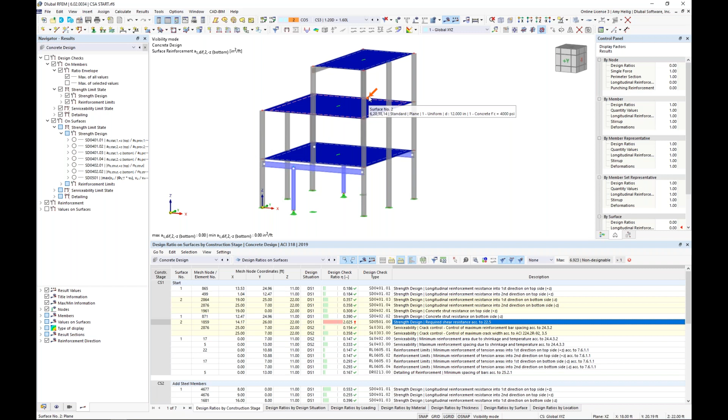We can also view the design ratios by the surface itself, but we're still going to show you, you can see one of the columns here, which construction stage this is applicable for, as well as the load combination. And as we select any one of these options in table format, what's new within RFEM 6 is visiting the design check details. And the design check details are going to give us all of our variables in table format. And you can see over on the right-hand side here, all of our equations.

And this one is rather complex, but if we scroll down to the bottom, we're ultimately going to show you how this design ratio is calculated step by step. We're going to give you the code references over here in the right-hand column. We also have additional code references in table format. So again, trying to be as transparent as possible where all of these calculations and code checks are coming from.

Notice here we have our drop down where if we're looking at this particular location, mesh node number 2154, we can also select here any one of the other construction stages if we'd like, and the program will automatically update our calculations over here to show for this particular construction stage.

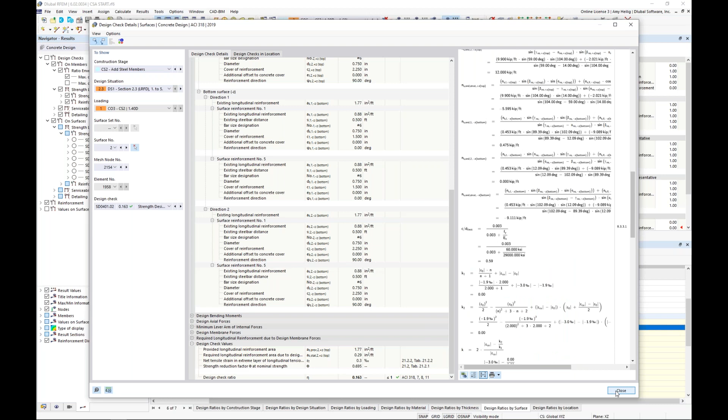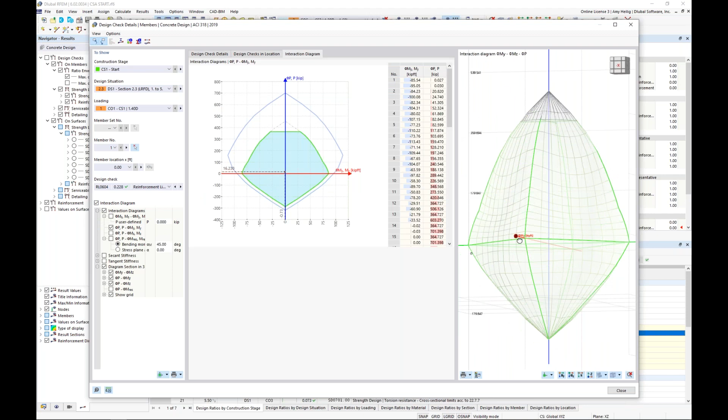Same concept here for our design ratios on our members as well. So we can see here design ratios by the construction stage. As we scroll through each one of these, we're going to see all of the checks here relevant to the ACI. We can also view, again, similar to the surfaces, the design check details. This one's a little bit more simplistic here for our member design, but the code equations are given, code references, and also new within RFEM 6 is we have added the interaction diagrams for these concrete columns. So now we see the 3D interaction diagram here. We can see exactly where we fall for this particular member.

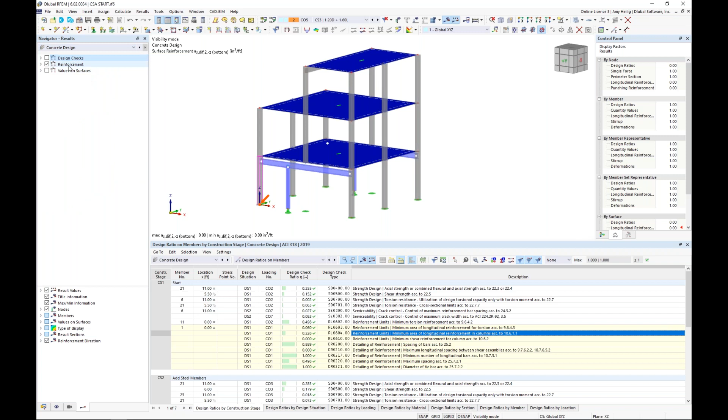Now we can export this information to Microsoft Excel. So table format is nice. We also can view all of this information graphically over here on the left. So we see now we're no longer looking at the static analysis, but we're looking at the concrete design. And if we right click here to collapse these folders, we can turn on the design check of our members, for example. We can take a look at the strength limit states and the various checks shown here to graphically see, compare this to our color panel, what exactly is happening for these members graphically as well.

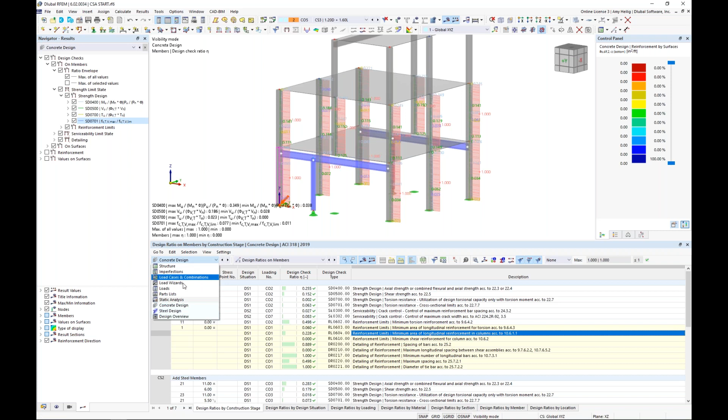So that will sum up just a quick introduction to incorporating the construction stages for the concrete design add-on, but to briefly touch on the steel design as well. Very similar workflow. You'll notice here under the steel design, we once again have our two design situations here, LRFD and ASD, and we will relate this to the strength limit state for our factored load combinations and serviceability limit state for our deflection checks for ASD design situation.

Under the objects to design, this is where I could graphically select all four of these steel members. I click OK, and I can run the quick calculation here. Again, I already have the internal forces. It just brings them into the steel design, applies the AISC equations to ultimately get the design ratios. So we can view the design ratios by the construction stage itself, and we see construction stage 1. We shouldn't have much available there because remember those steel members didn't exist, but for construction stage 2 and 3, we see all of the relevant checks shown here.

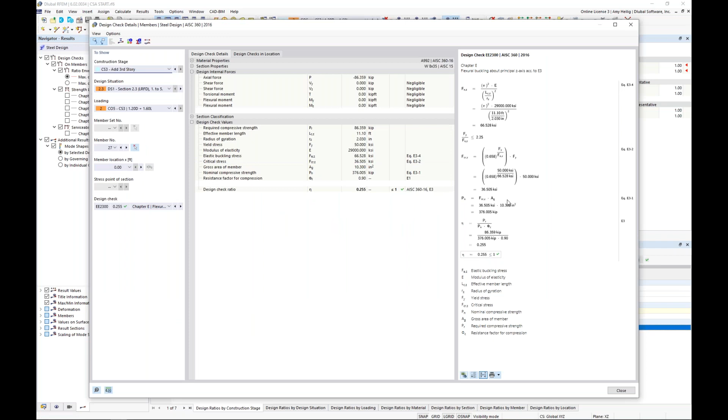Now you can also utilize the filter options, and if I don't want to see every single chapter for each one of these members or construction stages, we can just filter to the max option. So now we see here what's actually controlling for each construction stage. And very similar to concrete design, we can visit our design check details, and we see here the code equations, the code references directly from the AISC 360, along with all of our information presented to us in table format.

Okay, so this will sum up the example today where we have modeled the entire structure. We created those construction stages not only for the model where we deactivated elements, activated other elements, but also the loading considerations where we need to factor in the construction stages as well to the load combinations and our design situations.

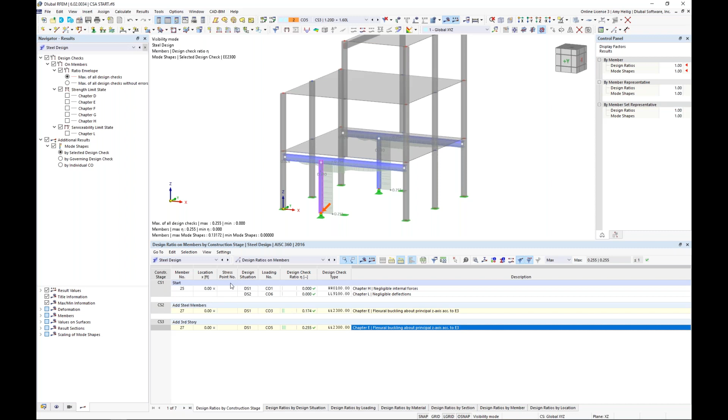And finally, we saw how we can incorporate those stages into the additional design add-ons. And keep in mind, it's not just specific to concrete and steel design, but we could incorporate this into our form finding add-on, aluminum design, timber design, and so on. So we'll go ahead and revisit the PowerPoint.

I did just want to touch on a few future developments that we can expect with our construction stages analysis. So we recently added in RFEM 6, which we already had them in RFEM 5. It just took a little while to get them into our new version RFEM 6, but we now do have line, surface, and nodal releases, and these will eventually be added to the construction stages analysis consideration. Remember, all of those options to turn on or off for activation or deactivation, we'll add in these elements as well.

I had already mentioned the stage analysis via load cases and results combinations utilizing linear superposition. So this will be extremely helpful for large models, many load combinations, rather than having to factor in these construction stages for each load combination. We can superimpose the results on the final structure to consider the stages. So this will be really helpful for just improved performance.

We also will be adding what we call phased massive cross sections and surface thicknesses. So we'll be able to activate the element parts step by step. So for example, if we would like to increase the dimensions of a concrete column, we'll be able to take into those phase activation here within the construction stages add-on.